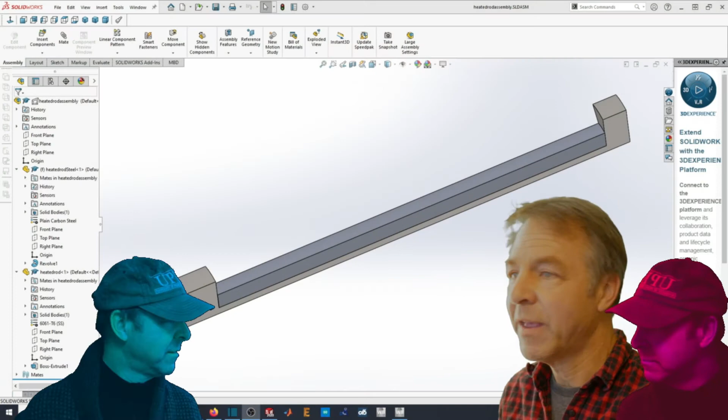Let's get to it. That's a soldering iron. Let's see how long it takes for the tip of the soldering iron to get hot. Come on, guys, I know you can do this. It's just a soldering iron, and you know what it's like.

I think you can say that it's made from a casing of steel with a copper core, and the core, well, I'll get the pictures. Don't worry, I'll find you some pictures.

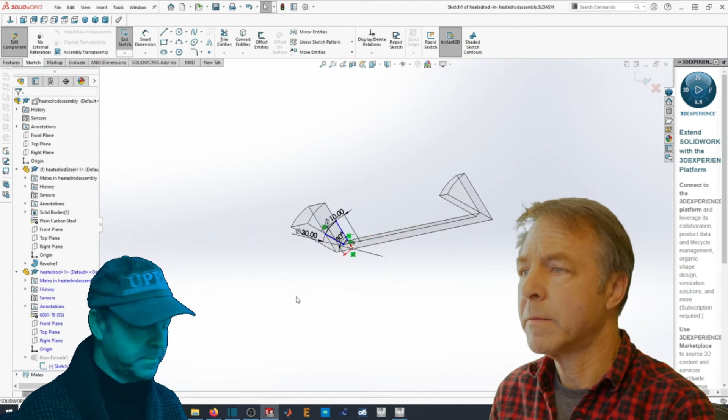This aluminum rod is curious because the dimensions are not showing up there, but the inside radius is 5 millimeters, and the outside radius is 15 millimeters. So it's a fairly hefty wall.

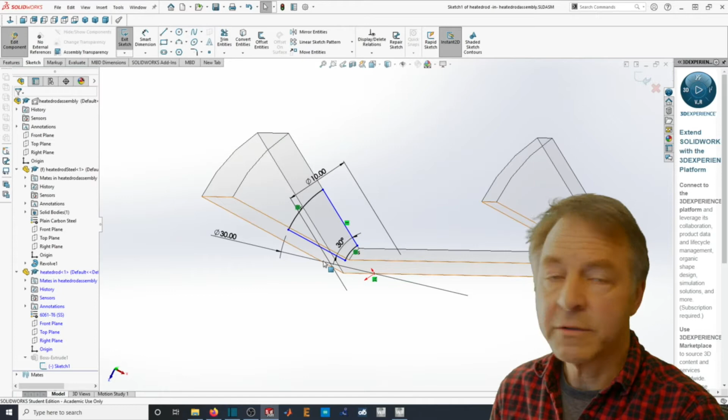What I've done here is, because we can take advantage of symmetry in this problem, I've only modeled a slice of it. So it's a 30-degree slice. Now, I've also modeled the outer shell, same idea. I've made it a 30-degree slice.

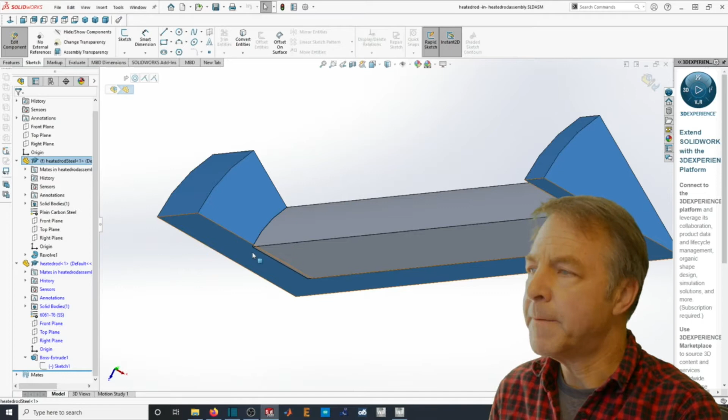And I've simulated it such that it should be aligned. I'll have to check that. I've simulated it such that it's the same slice, and more importantly, this face on the steel and this face on the aluminum are coincident.

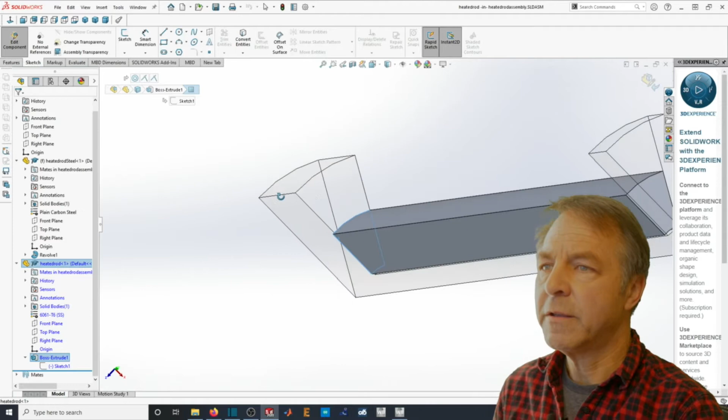So if we do that, then we should end up with an assembly here that's fully in contact. Then I've taken the assembly and simply saved the whole assembly as a step file. If you do that, then you can import it directly into ANSYS.

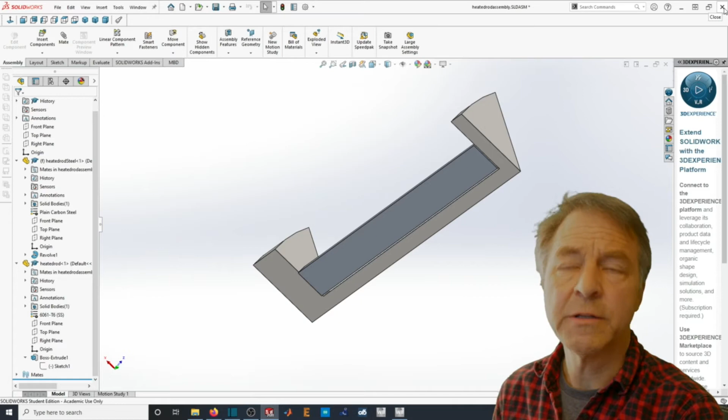Oh yeah, for that soldering iron, I checked it out, and it says on the label that it's 65 watts. Here I am in the ANSYS window, and you've seen this before.

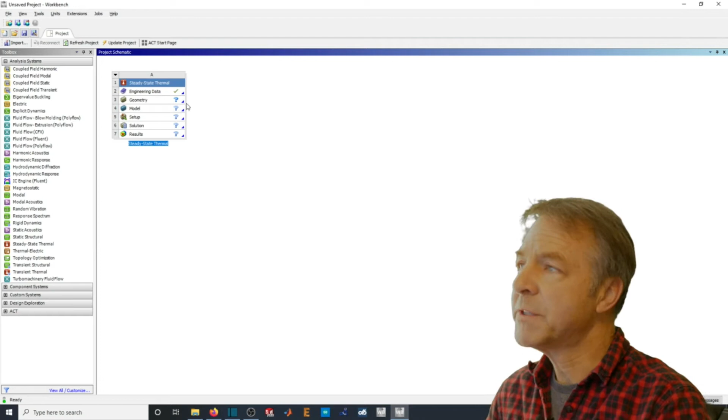Now, what we're going to start off with is a steady state thermal problem, and I'm just going to drag that into a standalone system. We could go through the steps as you have before, but before we do that, let's do another trick.

Because we want to do the thermal analysis, we want to actually expand or heat up the part, then we want to see what stresses are involved with it. We can actually do a coupled analysis.

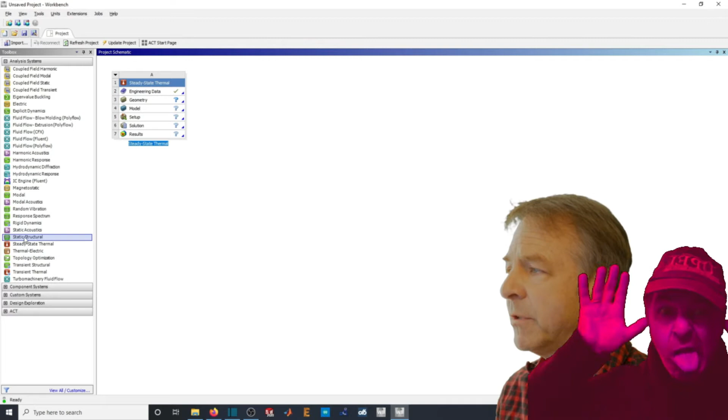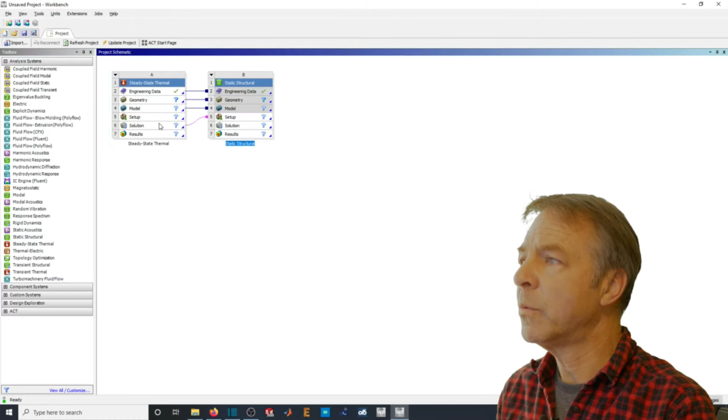Literally in this graphic, we could take a static structural simulation, and we're going to use the same engineering data, the same geometry, the same model, and the solution, in fact, from this. And if we link that, it shows up as a linked system.

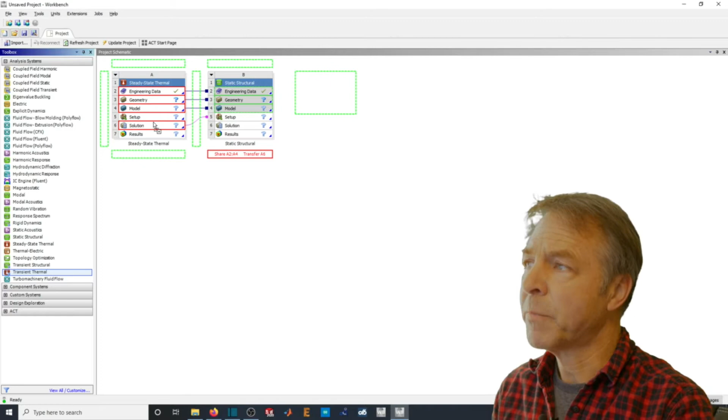Now, we could also do, let's say, a transient system. In this case, we want to use the same engineering data, the same geometry, the same model, and the same solution, perhaps, as the steady state thermal.

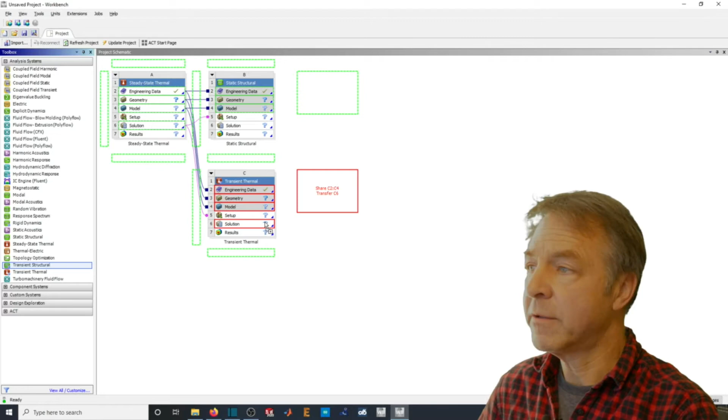And so that allows us to now do a transient. Now we could even go further and do a transient structural analysis from that, where we're going to share the data from there. So now you can see that with ANSYS, we could start off and do all of the work in creating the conditions for the steady state thermal model and feed those into more sophisticated analyses later.

So now that we've done this, I'm going to save this project as rod example.

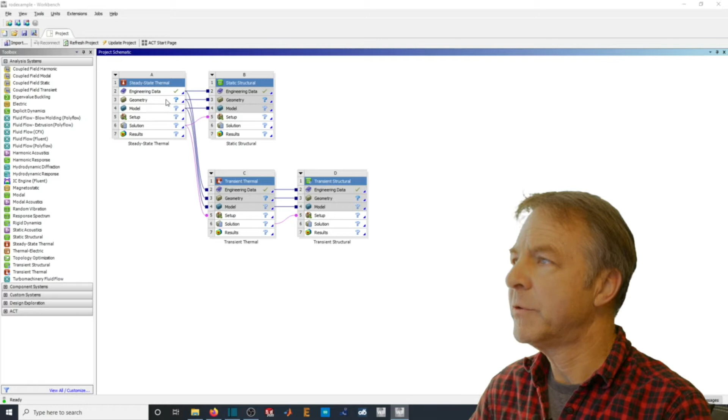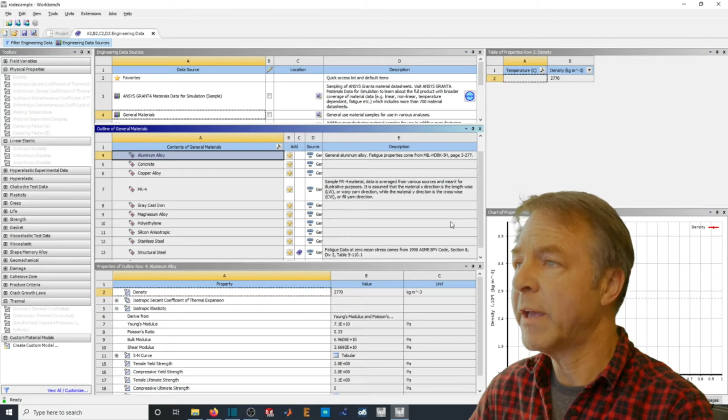I'm going to go to the engineering data here, which you've been through before. I'm going to edit it, and from the engineering data sources, I want to add a general material. I'm going to use aluminum since I want a coupled aluminum and steel system. Now that engineering data will ripple through all the different analyses I'm going to use.

I will import my geometry. I'm going to browse, and the geometry I'll import was here somewhere - the heated rod assembly step. You'll see that that geometry ripples through to all the different models.

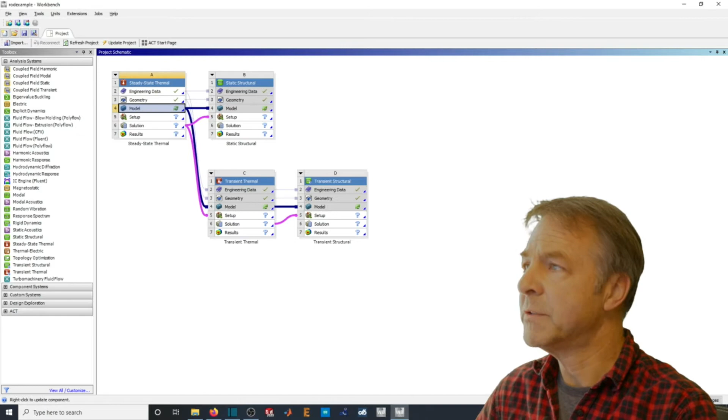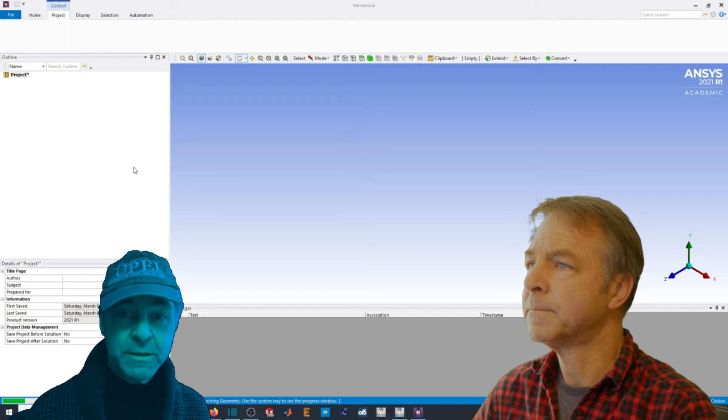Now, since the first model we're going to use, which is shared with all of the other solutions, is the steady state thermal, we can open up ANSYS Mechanical. I bet you probably know already that it's convection, and you're going to go pick a film coefficient that makes sense for convection. And if I were you, I'd be saying it starts at room temperature. Once it's done opening, you'll see we have all the different analyses we're going to use, shown here on the tree on the left.

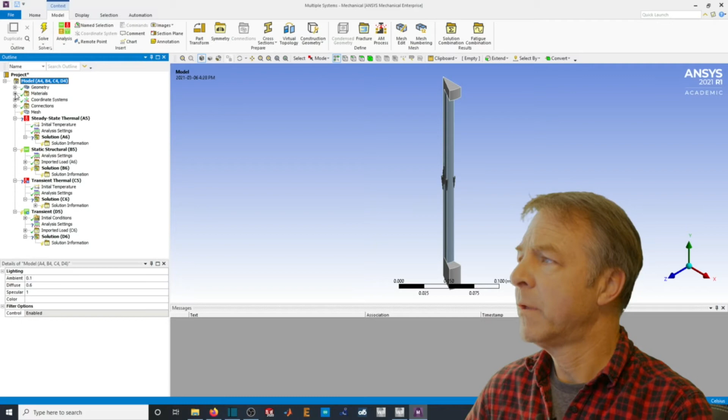Now the first thing we're going to want to do is check that the geometry was loaded - we've got two separate objects there. The materials, we've got the two materials at our disposal. The first thing we want to do is a material assignment. I'm going to select a body and choose that body and assign it.

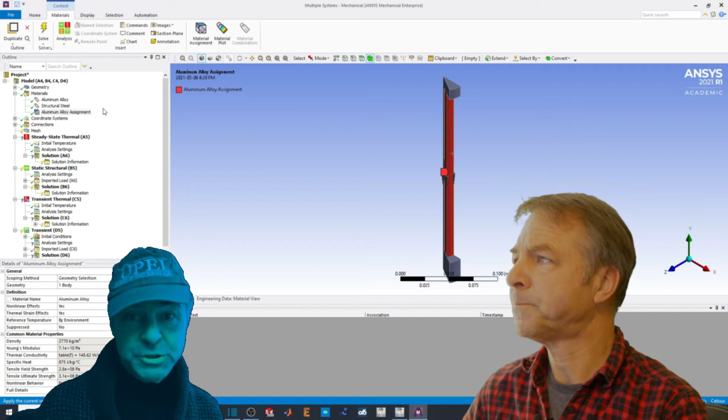Around it is room temperature, and then I'd let it heat up from that. Then I'm going to do a second material assignment, and I'll pick that body and assign it. And there we're finished - we've got those two materials assigned.

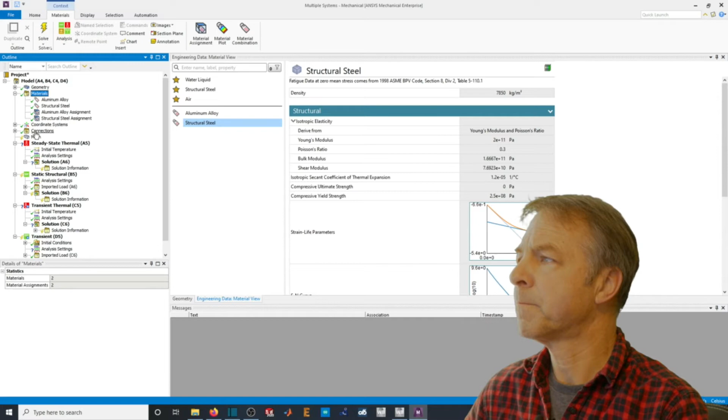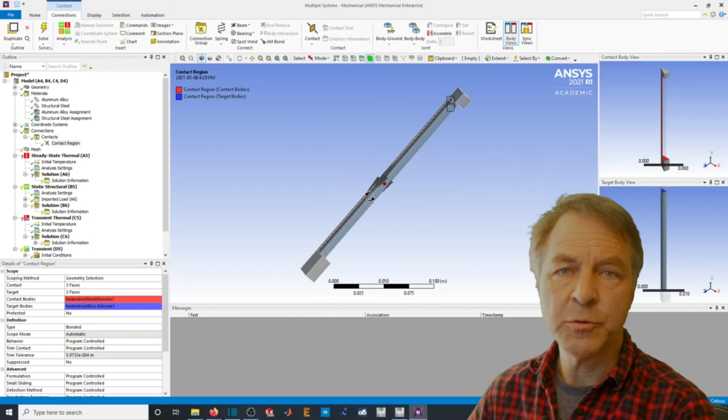Now the other thing that's new, which we haven't done before, are connections. You'll see in the connections tab that it's showing up as contacts, and the software has already identified that the model I've put in has these contact areas between the two parts. That's good. If we had designed the parts such that there was a bit of clearance, we could still specify a contact area between those clearance regions. But for the moment, with this model, we're fine.

So the first thing we need to do is the steady state thermal. Initial temperature, we're setting that up at 22 degrees. Analysis settings - it's a steady state problem, so we'll just leave those as standard. Now to the solution.

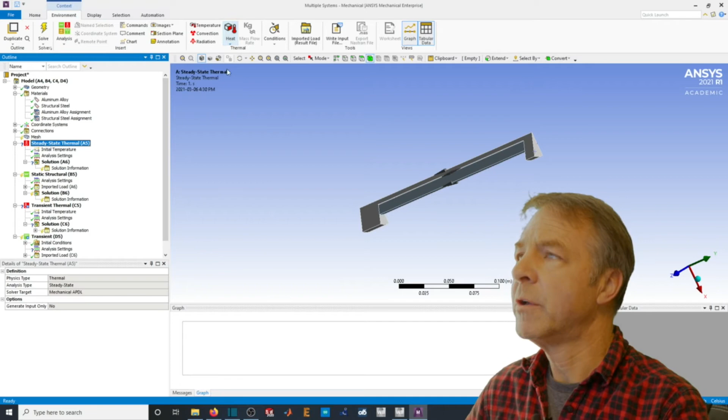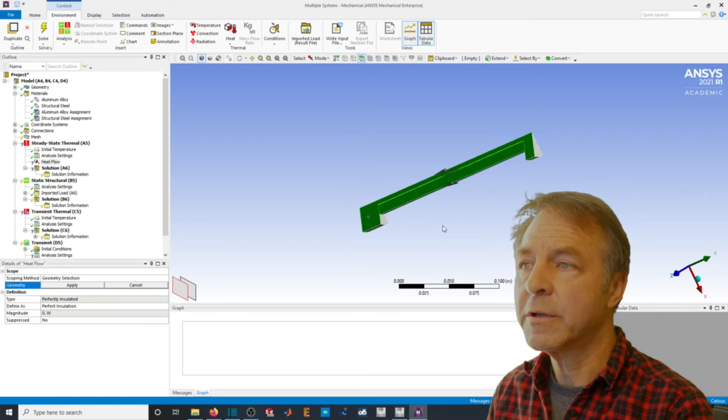To here, we need to add some conditions. For starters, since this is a thermal analysis and we're using the idea of symmetry, as you saw in a previous video, if we use a perfectly insulated boundary, that does the job of simulating our slices. So I'm just going to make these perfectly insulated, and I'll apply that.

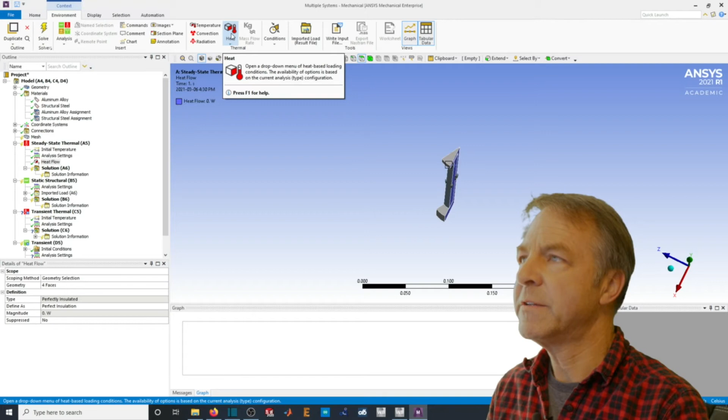So now for the rest of the conditions, I want to add some heat. I'm going to add heat flow to this top surface and this surface, and put in about 200 watts perhaps - I want to show heating this up a lot. Now, this is a 30-degree slice of the full circle, so the 200 watts I'm imagining putting into the end of this would be divided by 12 slices. So that's 200 divided by 12, something like 15. I'm going to make it 15, so I've got 15 watts going into those surfaces.

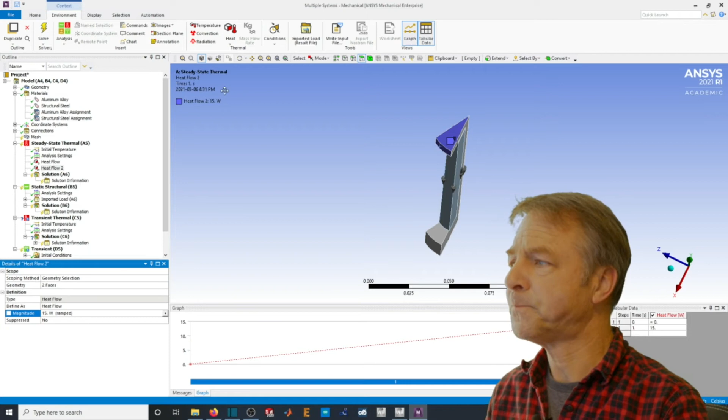Now the other thing I'd like to include would be some convection. I want to pick that surface and apply that. I don't really want convection on any other faces, but I'm going to give a film coefficient of 10 watts per meter squared.

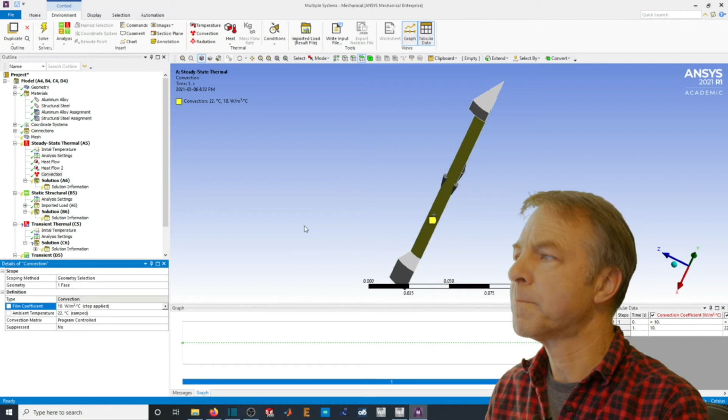Now for the rest of the surfaces, I'm actually going to assume that the bottom of this is perfectly insulated. I'm not going to really worry about these small surfaces here. I could, I suppose, but I'm not going to do that.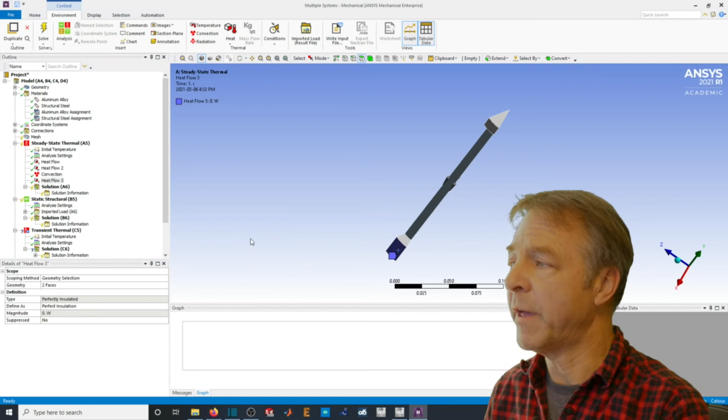So with that, now I've fully defined the steady state thermal, and I can solve that. Oh, before I solve it, I'd better say what I want to see as the output. I want to see the temperature distribution, and I'm always interested in the total heat flux. So, solve.

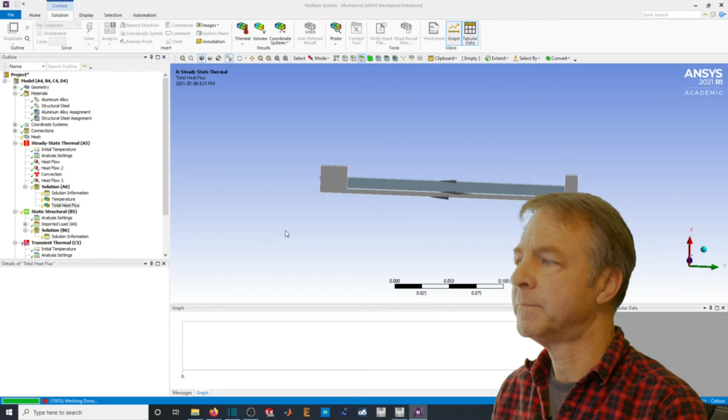And there we have it. Now for the temperature distribution, whoa, that gets hot. My minimum temperature is 889 degrees C, and my maximum is 1070 degrees C. That 200 watts put into this thing is gonna really smart. So we've got quite a temperature gradient through there.

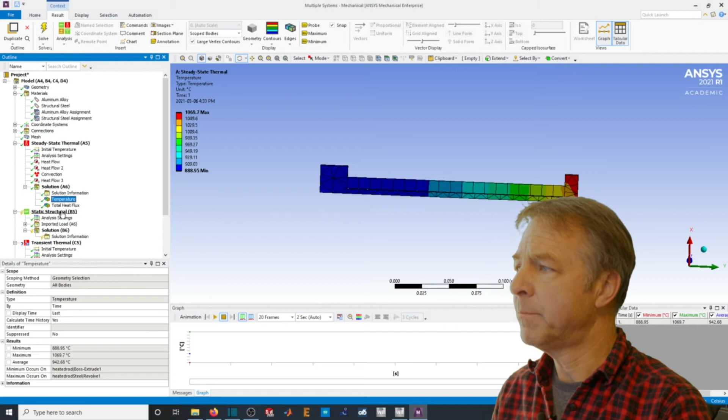Now, because we've heated up this part so much, we can look and see what that means for the structural analysis. You recall that I've imported the load from the body temperature that's just been solved. And I need to add some more conditions here because I haven't actually imported the structural elements.

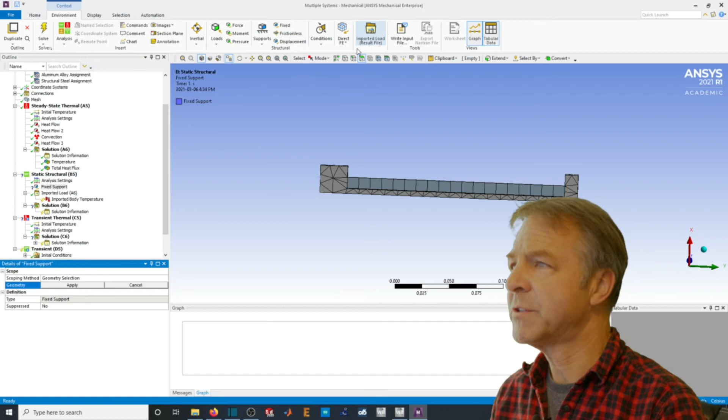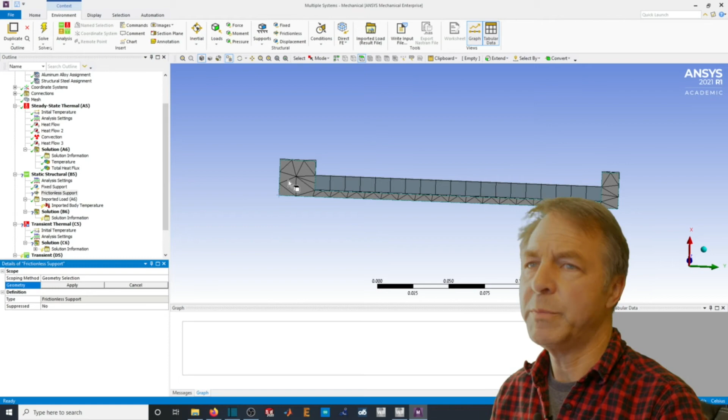Really all I'm going to put in here are some supports. I'm going to have a fixed corner, I'll pick that vertex as fixed. And for supports, I guess I want frictionless supports. And that would be this face, this face, this face, and this face.

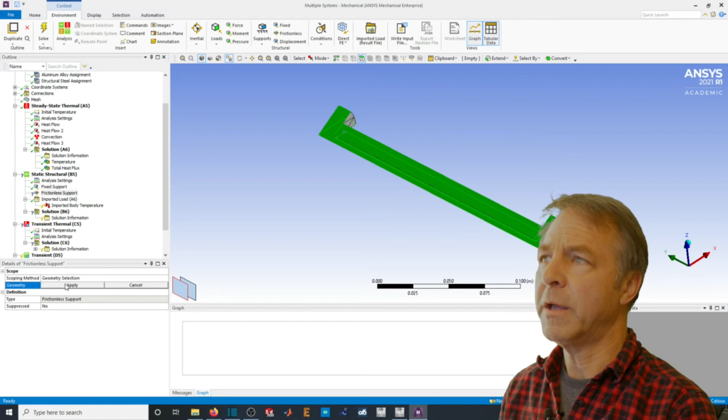Recall that when I said with symmetry, things that are crossing perpendicular to the symmetrical surface aren't allowed. And if I have a frictionless surface there, then this part can slide on that surface, but it can't bulge into it or pull out of it. There, so that should be sufficient.

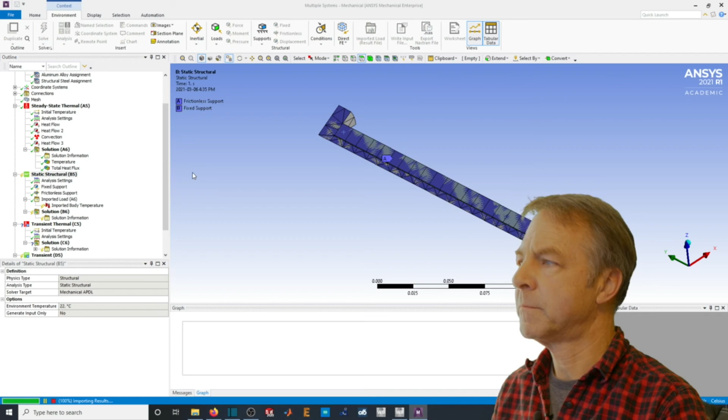And with that, I should be able to solve. Oops, and once again I forgot to specify what I wanted to solve for.

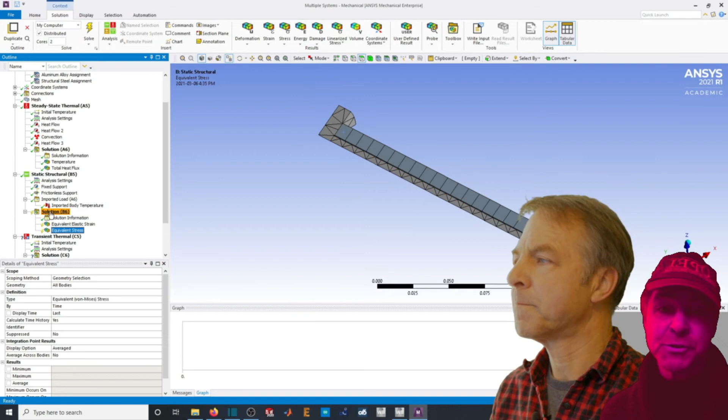Yeah, maybe they know what the room temperature starting point is, but I don't think they're gonna figure out the film coefficient. Guys, I know you can do this. I know you can do the film coefficient. It's gonna be awesome. So I've got my equivalent stress.

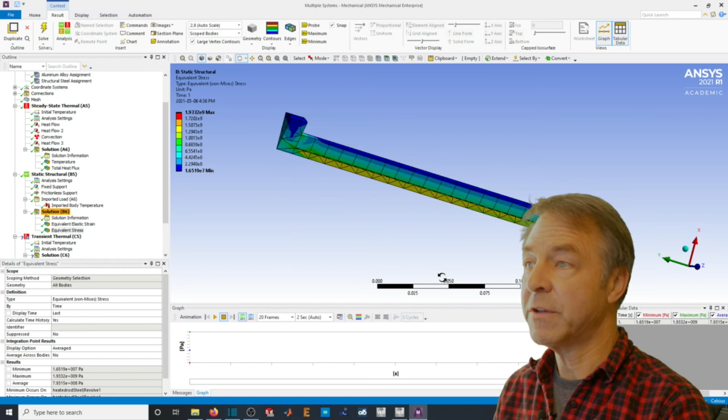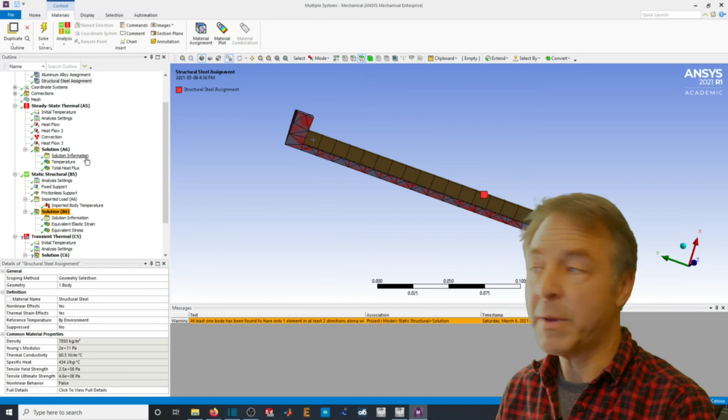Now I made a pretty coarse grid, and that was just for saving time in the video. You can see that my stresses are 10 to the 9th. Now it happens that if I look at structural steel, the yield strength of structural steel is 2.5 times 10 to the 8th pascals. And if I look at the stress, I'm at 10 to the 9th.

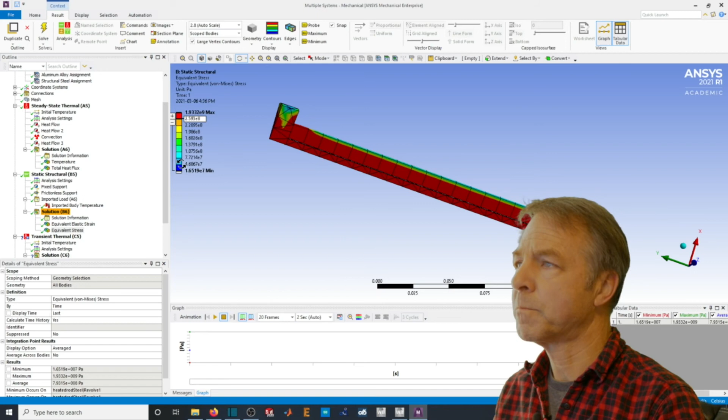So if I just move that down to 2.5 times 10 to the 8th, you can see from that plot that according to this simulation, I've definitely yielded this material from the thermal effects.

Now the stress, it's the same. The stress is calculated for both the aluminum and the steel. The yield stress for aluminum, however, is quite a bit lower than that of steel. Regardless, we know that the aluminum is fully yielded in compression, and the steel will have yielded in tension.

Now we could carry on and do the transient analysis, and that will take a bit more time. But I'll stop there because I think in one of the previous videos you've seen some of the transient done, and I think you can follow along the same process.

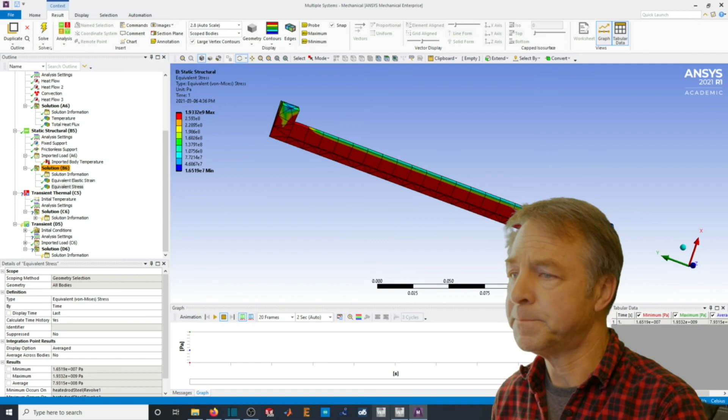So that's an example of using ANSYS in a bit more sophisticated way to do a coupled analysis, where first you solve for the thermal, and then you can solve for the structural, and you can continue with other types of solutions that share data and share results to make the next part of the model carry on. So it's a really powerful tool, and with this, we're getting into some of the reasons why ANSYS is such a useful tool for you to have some power with.

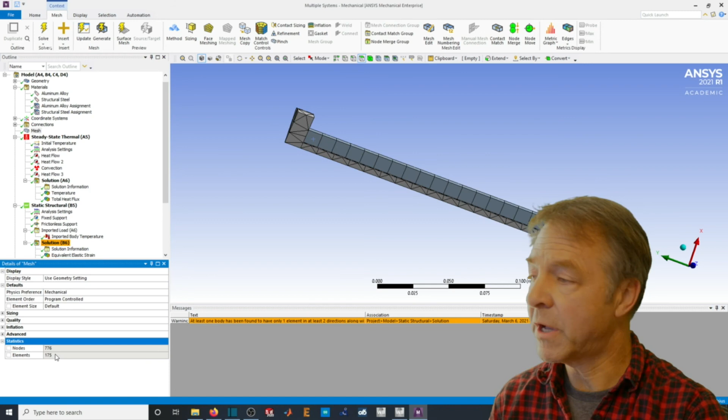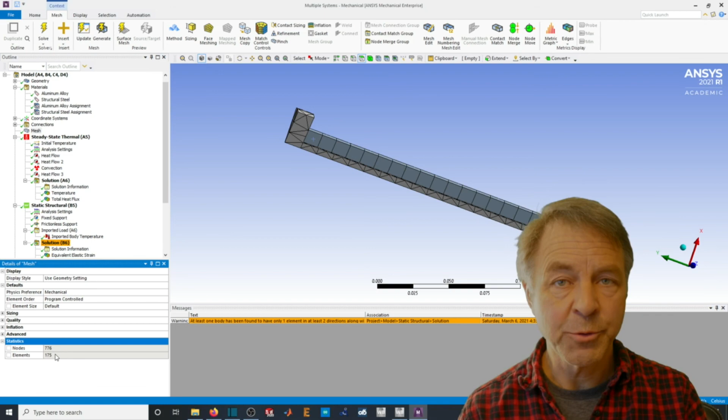Just before we go, let's have a quick look at this model and the statistics of the grid. So if we go up to the mesh, then you can actually look at how many nodes we had. I ran this model with only 776 nodes, 175 elements, which is quite coarse. Now, I ran it separately with about 10 times that number of elements and validated the same result. The fact is that you need to, as I've said before, try some different grid sizings. For the purpose of this video, though, I kept it coarse so that it would go through quickly. Oh, and don't forget the assignment.